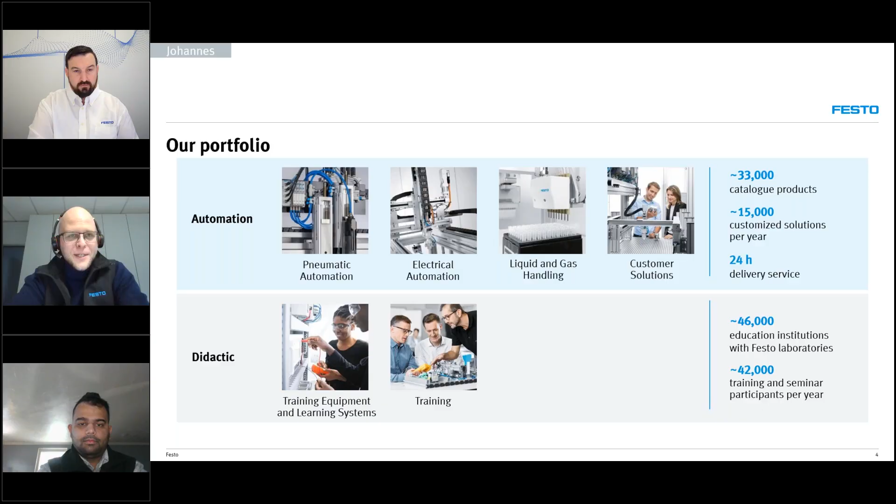With that, I would love to open up the stage for today's topic, more specifically the solutions for life sciences. The purpose which drives us, the mission here, is advancing human health through automation. Really looking forward to the upcoming presentation. With that, Ross, it's your part.

Hello everyone, my name is Ross. I'm coming to you live from our Technical Engineering Center in Marlborough, Massachusetts. I'll be discussing the applications of laboratory automation and diagnostics. Festo has about 33,000 components and is developing new products every day with inspiration from industry. Today we'll focus on the core life science applications. Some of you may not be familiar with the technology, so I'll go into a brief example for clarity.

With sample handling, it consists of 3D gantries, end-of-arm tooling, automation software, and sensors for precision and reliability. In vitro diagnostics are tests conducted on samples taken from the human body, such as blood, tissue, and other bodily fluids, to detect diseases and conditions, as well as infections. In vitro point of care diagnostics are tests done at a faster process, normally close to the patient, and cut down on lead times for samples to reach the lab and deliver results. These are normally tabletop solutions that do not scale up.

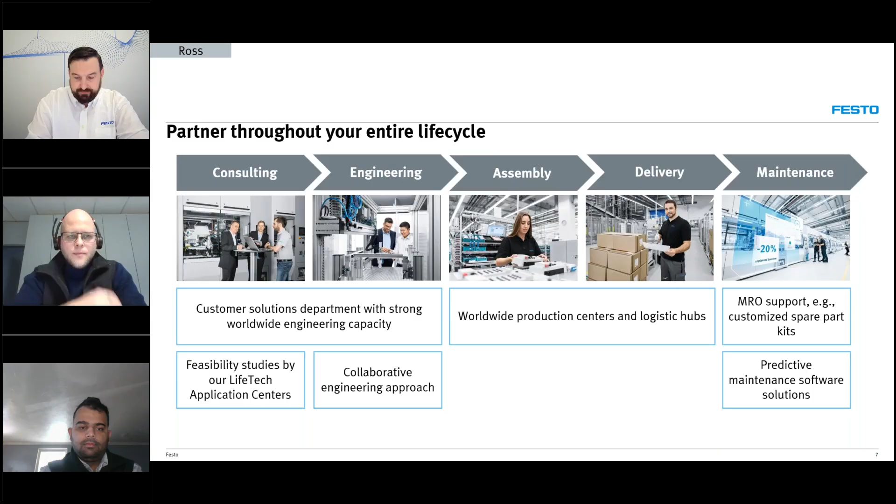So some of the examples of how we develop technology will be shown in the next few slides.

In this example, we were asked during the beginning stages of the COVID-19 shutdown to integrate an end-of-arm tool that could aspirate and dispense on a pre-designed system. Additionally, we needed an end-of-arm tool that was compact and capable of gripping and decapping sample vials, which hadn't been created yet at the time. The challenges here were precision, reliability, and increased throughput of tests per hour.

The previous process was done by hand. It was very slow and risked human error as well as cross-contamination. With software automation and custom designed components, we were able to achieve a system for the customer that increased throughput and accuracy from tens of samples per hour to over 320 samples per hour.

So here, the real challenge and success was creating a very compact rotary gripper that could decap, cap, and grip as well.

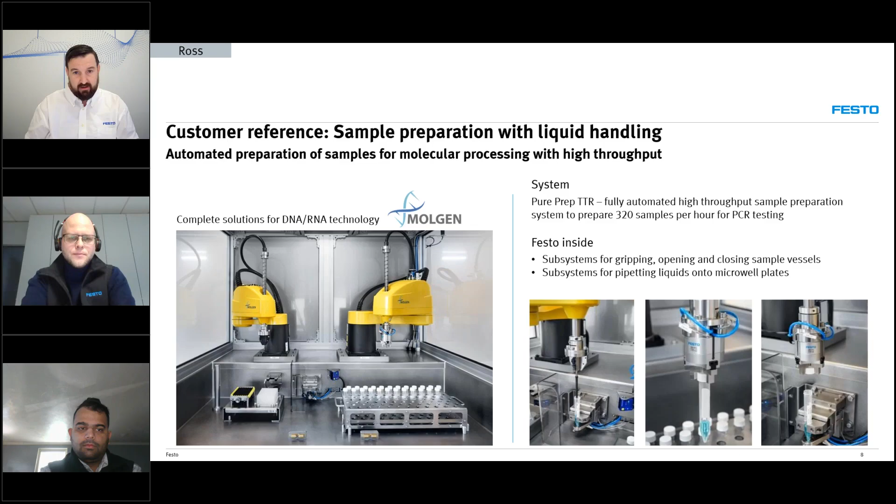In this next example, we helped reverse engineer an in vitro diagnostic process that analyzed DNA and designed a smaller mobile point of care system made up of about 90% Festo components. The original process was stationary with a much larger footprint, which we were able to reduce to about 2 feet by 4 feet, as well as making the application mobile.

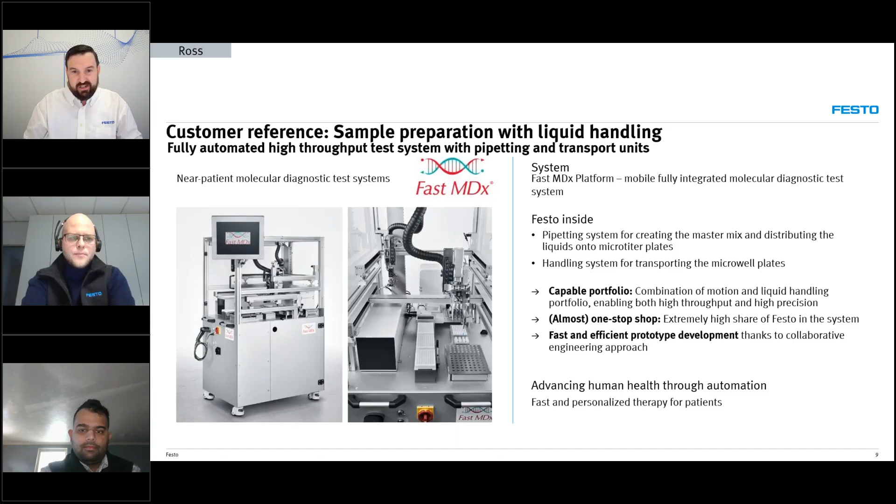The project highlights the importance of product synergy, as well as the additional design services offered by Festo, which is a standalone component supplier. As any other standalone component supplier, this is very important, and not many companies can achieve this other than Festo with our hybrid model.

In some cases, customers want a stationary industrial solution, but labor costs and operation can be expensive. In this example, Festo was challenged in creating a continuous process from start to finish that was completely automated. Many of the components used here included dispensers, decappers, grippers, AI-driven optical scanners, and conveyors, all integrated with automation software. The solution reduced the cost and labor size and streamlined the efficiency of extracting DNA samples from different vegetation to enhance the development of resistant seeds in agriculture.

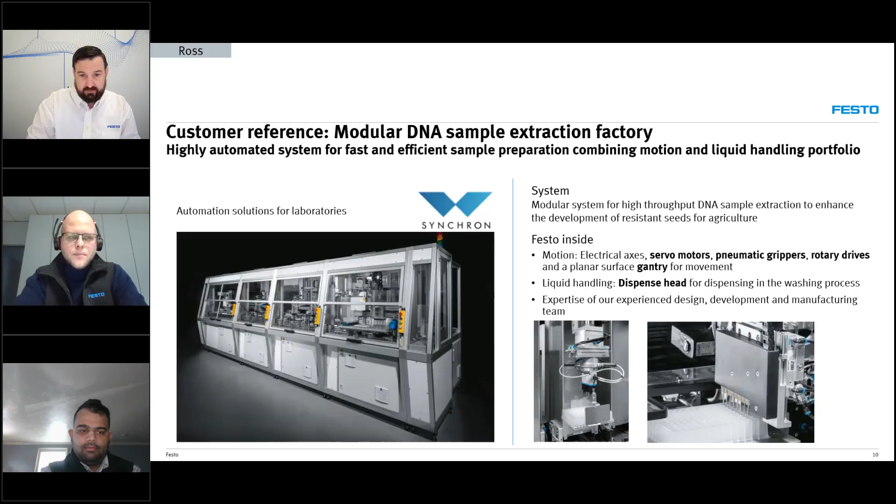Another challenge, inspired by industry, was a process of cellular growth for vaccines, gene therapies, and lab-grown meat via bioreactors. Although the process has been perfected in large-scale production, the most cost-efficient way to improve this would be to scale it down and provide a smaller batch and smaller footprint for R&D labs who are limited by space and costly research real estate.

Knowing there would be an increased need for this in the future, Festo invested in designing new components such as piezoelectric-driven valves, mass flow controllers, and vacuum pressure generators to aid the process of creating tabletop reactors, bioreactor systems that achieve optimal cellular growth. With that, I'll now hand it over to Sid to give you an in-depth look at the components that were developed through the industry needs.

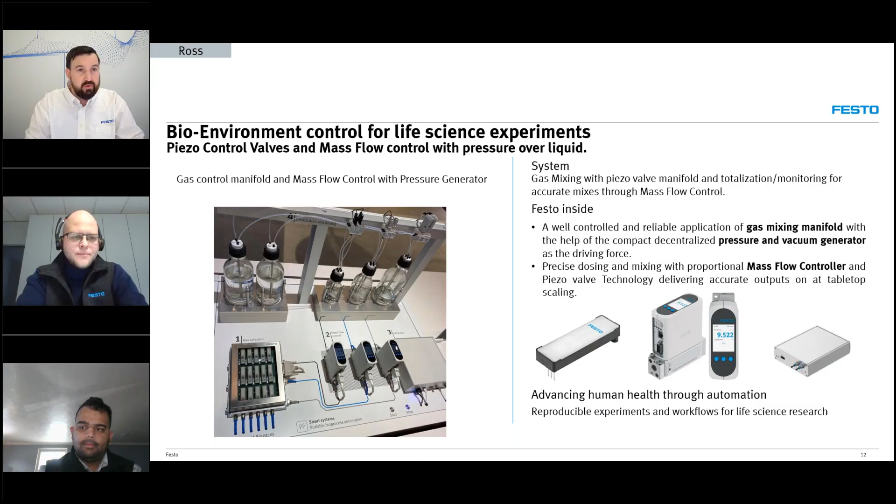At our Marlborough facility, as Ross already explained, there are 4 areas for life sciences, biopharma, or laboratory settings in general where we have deployed some of our solutions. When it comes to sample handling, IVD, point of care diagnostics, and bioreactors, we also need to break it down to some fundamental building blocks and talk about other aspects of automation where we may face challenges while commissioning such systems.

One such aspect is handling the liquid itself. It could be the high throughput of buffer solutions required for sample handling, or it could be non-invasive analysis of samples in IVD and point of care diagnostics.

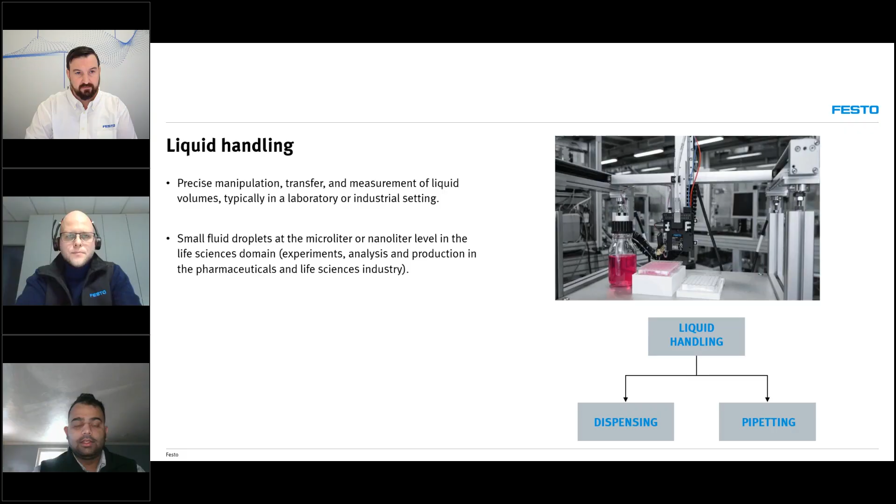First I'll get into what's liquid handling in general. Liquid handling means the precise manipulation and handling of liquid volumes in a laboratory or industrial setting. This could go down to small fluid droplets at the microliter or nanoliter level for preparation, experiments, analysis, recording data, and so on. Liquid handling is classified into dispensing and pipetting, and I'll give a traditional picture into dispensing and pipetting and how we need to automate some aspects of these processes to get rid of the challenges we have at the industrial level.

So, dispensing. Dispensing is a pressure over liquid process. It can be a contact-based or a non-contact based process.

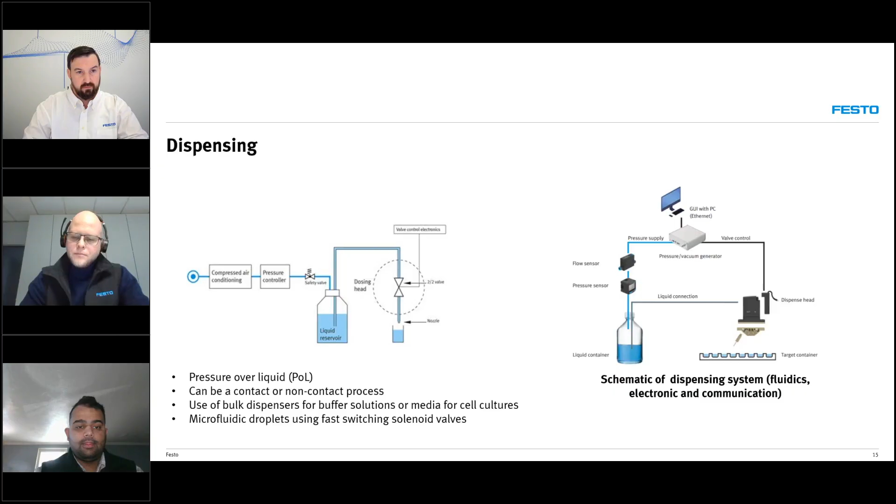Similarly, pipetting is a contact-based technique where we aspirate a specific volume of solution at one source container and deposit this solution to another target destination by using a permanent pipette tip, or a stationary metal or plastic pipette tip. It could be something like hypodermic needles.

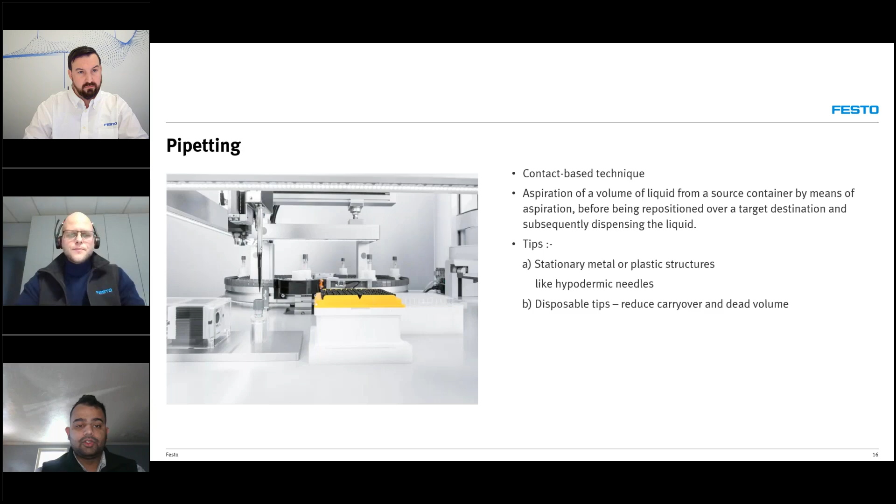We are also using disposable tips, which can be used to reduce carryover or cross-contamination between different samples during the dosing process, especially useful for handling patient applications. For example, where we have a PCR sample from a patient, and it's unique to each patient we are working with, and we want to minimize carryover as much as possible. So the use of disposable tips in such a scenario is the most optimal way of dealing with samples when we talk about traditional pipetting.

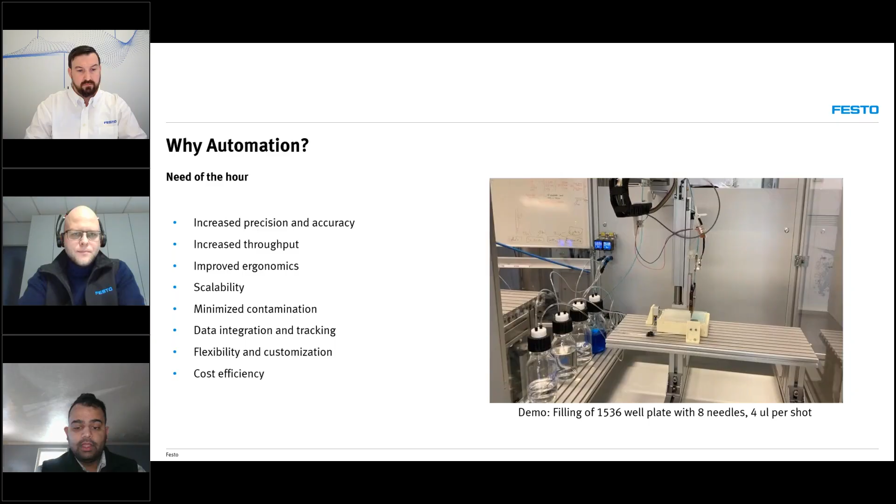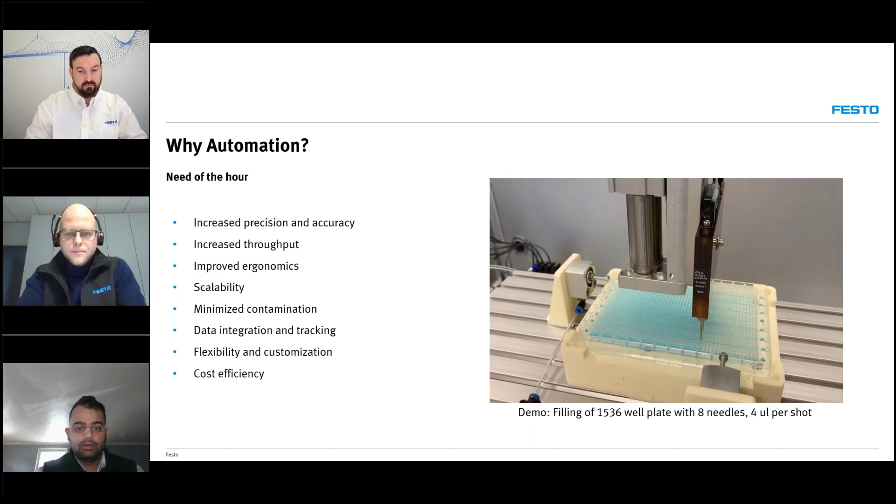However, we have seen during various situations, especially during the pandemic, that we need high throughput through these systems. We need increased precision and accuracy, which is one of the quality check parameters for these processes. Minimized contamination, as we already touched upon during dispensing and pipetting, as well as the flexibility to integrate various dispensing components into the overall modules that we use for dosing.

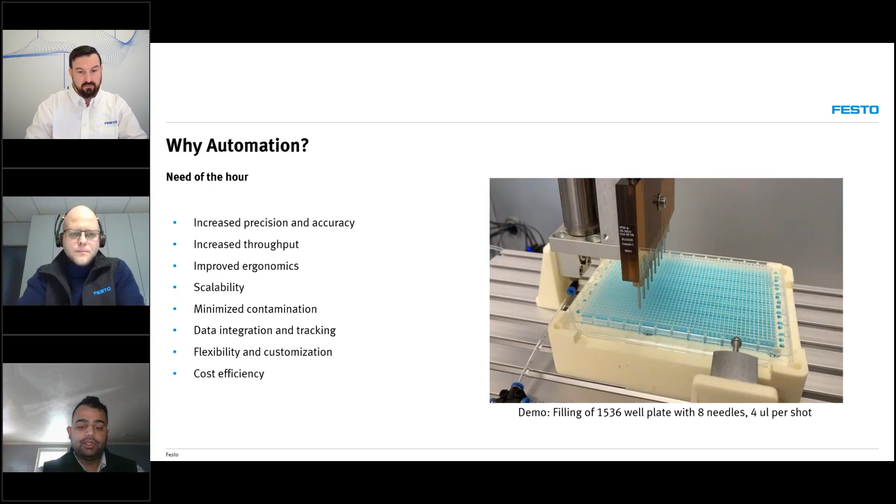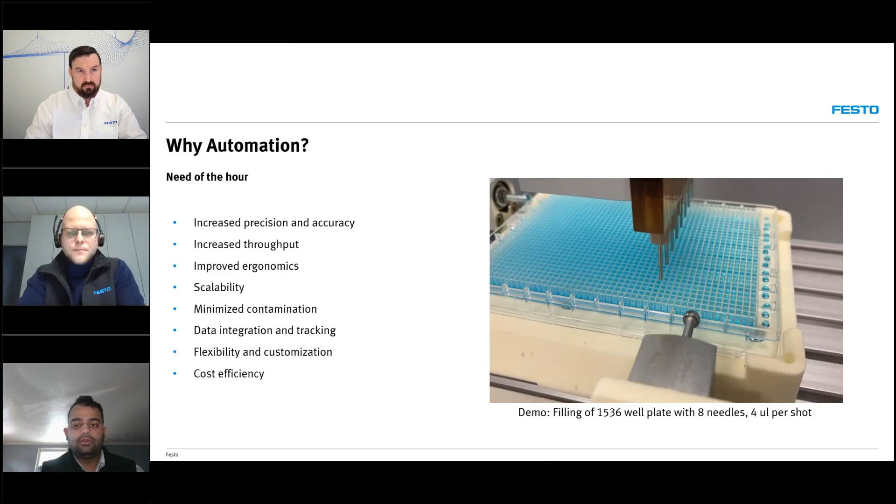So here you see a multi-dispense head Festo module in action, where there's the filling of a well plate. The lowest that we see here is 4 microliters per shot.

First, talking about dispensing systems, how do we solve the needs for automation in dispensing systems? We have these multi-channel dispense heads at Festo, where we can go from a few microliters to milliliters, and the internal components, including manifolds and valves, are media-resistant materials as far as both aqueous and non-aqueous solutions are concerned.

The individual configurability of each dispense head is something which sets these modules apart, because each dispense head can be configured for a different pressure, different actuation time, volume, and so on.

Easy integration is extremely important, especially when we are working with a multi-domain, multi-specialization industry. Our users could be biologists, somebody who's an expert with PLC-based automation, or a fresh student out of university who's very used to the Python environment. So we have drivers for each of these devices to cater to the users, and they can be integrated easily into their overall automation workflow as far as their code base is concerned.

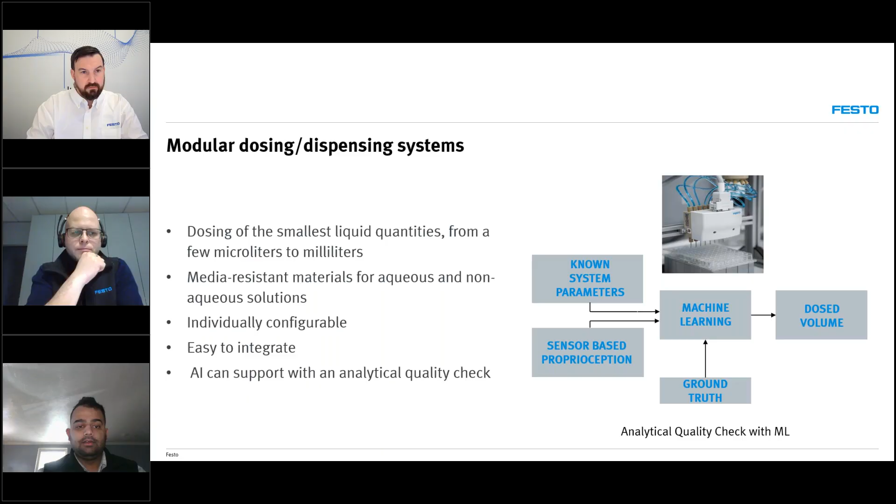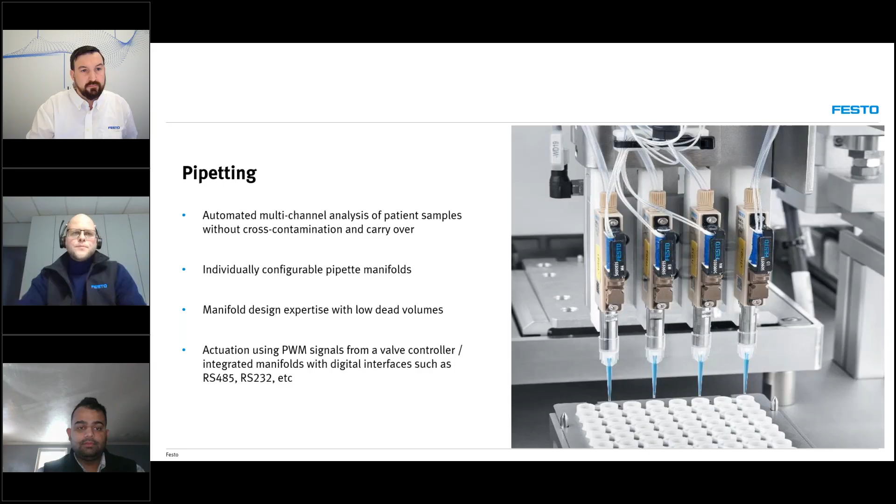In the traditional context, if we look back a few years, for setting up something like this they would have to take a huge bulky solution with an overkill in terms of the pressure being supplied, in terms of the number of valves in the manifold. It could also be that those systems would only work in conjunction with a PLC system for control using industrial protocols like EtherCAT, Profinet, etc.

So a lot of these requirements or features were an overkill for our biologist user in the academic market, or for even startups in the biopharma or life sciences space. So what we developed is a modular approach to tackling such problems.

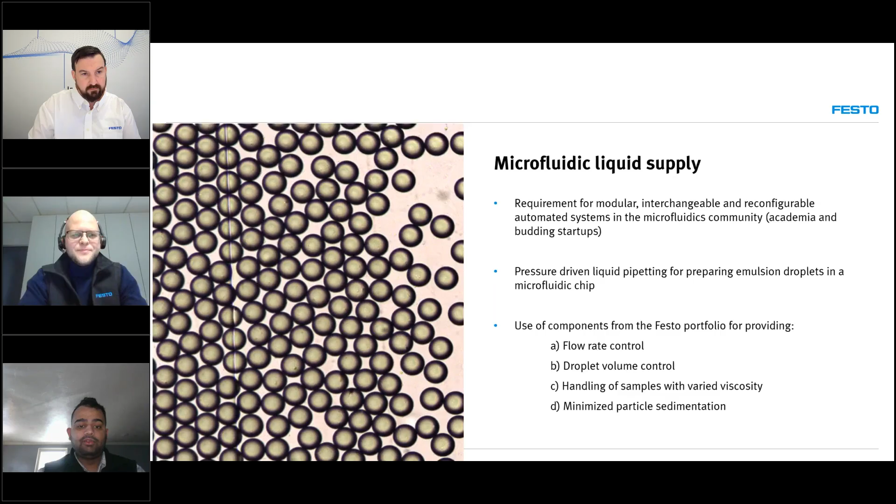Amazing, thank you guys. So we come to the last part of the presentation, and we want to give a bit of an insight into what's driving us at the moment. We've been a bit selective on the topics here, as well as the technology to show later, but it might be a nice insight to see what's ongoing.

What we're recognizing at the moment is the beginning of cell and gene therapies, and a lot of tissue and organ manufacturing, which places interesting questions to us as a component manufacturer—from handling cells to being able to produce in a sterile manner. These are things we're assessing at the moment, but also the question of minimizing sterile environments or volumes in a process is one topic, and I will present one technology offering a solution for that.

We also see a lot of healthcare automation, in particular from the working group here in Mass Robotics. We had wonderful use cases this year and last year, leading the way into automating dangerous and exhaustive processes which are actually dangerous for humans to execute.

And then, more in the healthcare environment, we also have process optimization, but individual patient monitoring, using for example wearable devices for tracking, using microfluidics for that is an interesting topic, on a very individual basis.

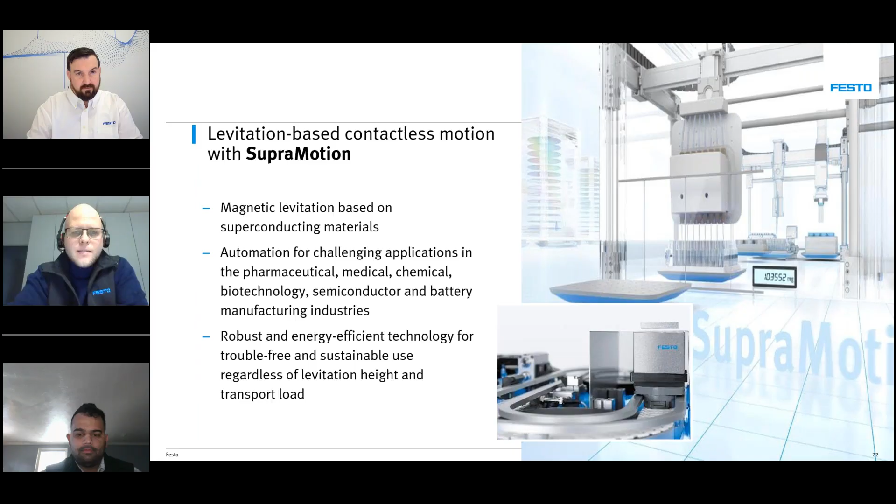If you go to the next slide, we can see in one application example how that actually works, or could work, together with different other automation technologies and products we have. This is a process which covers the entire process of filling a biological product.

In this case, our process was a microbiome therapy, and there are certain containers which have to be filled with exactly that kind of therapy before being dry frozen. These therapies have to be handled and filled in a sterile environment, a clean room environment, because the therapies are getting in touch with the ambient environment.

With the ambient air, which makes it critical here to move things into the sterile environment, but also to handle it within the sterile environment without any contact.

The principle behind it is a superconductor, which is frozen down to a certain temperature—usually about 70 Kelvin. And the magnet on top is frozen into that position, more or less sticks in that position, which enables us to be rigid, depending on the geometry of the magnet, to be fixed in position in the room no matter how we tilt in the end the good which we want to transport.

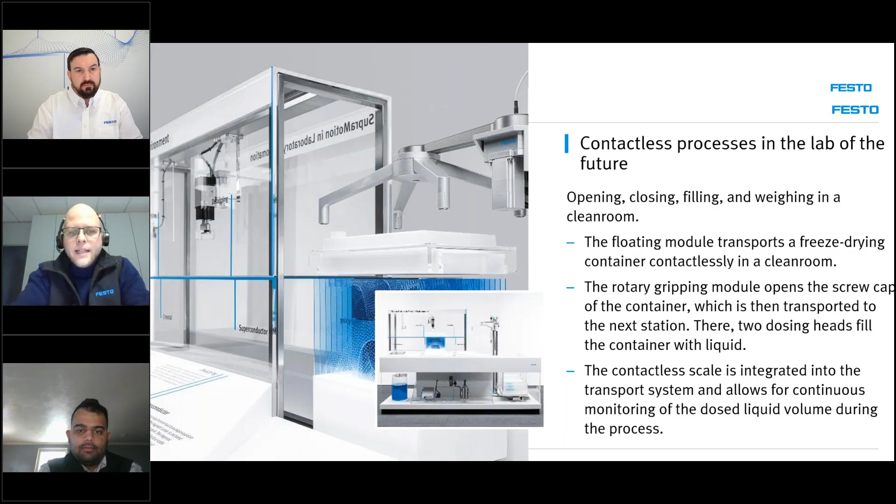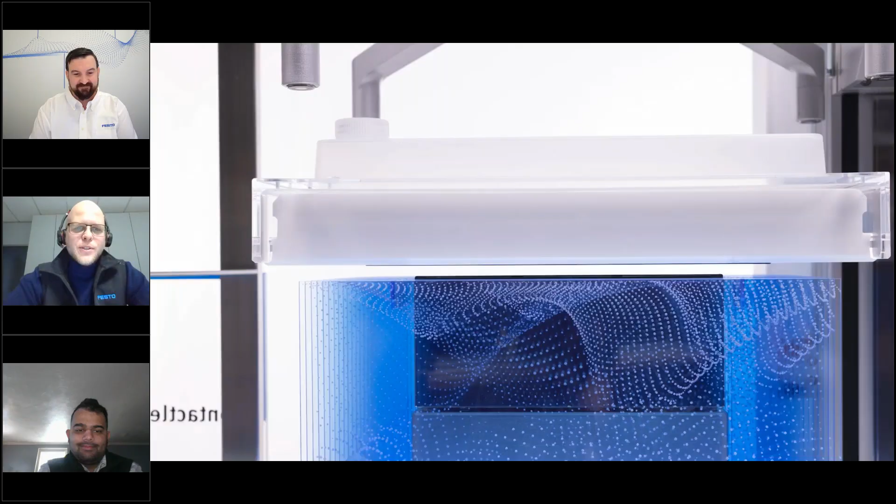If you go to the next slide, we have a nice animation for that, how the process could look like. Apologies for having the first slogan in German—it's like 'Supramotion in a lab automation environment' as a translation.

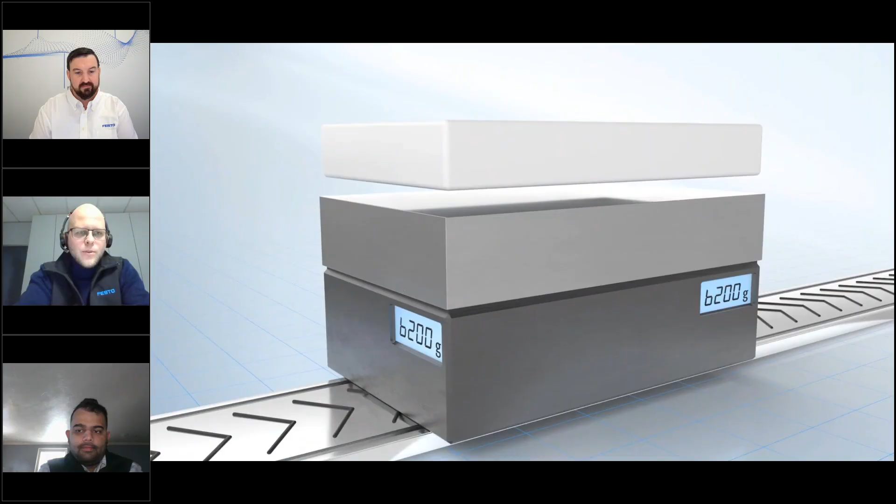What you can see here is the lower block is a scale which is moved. We have a cooling element, a cryo cooler, which has gone down to those 70 Kelvin. And on top we have a magnet conveyor, which can carry a certain load, and this can be brought into a sterile environment.

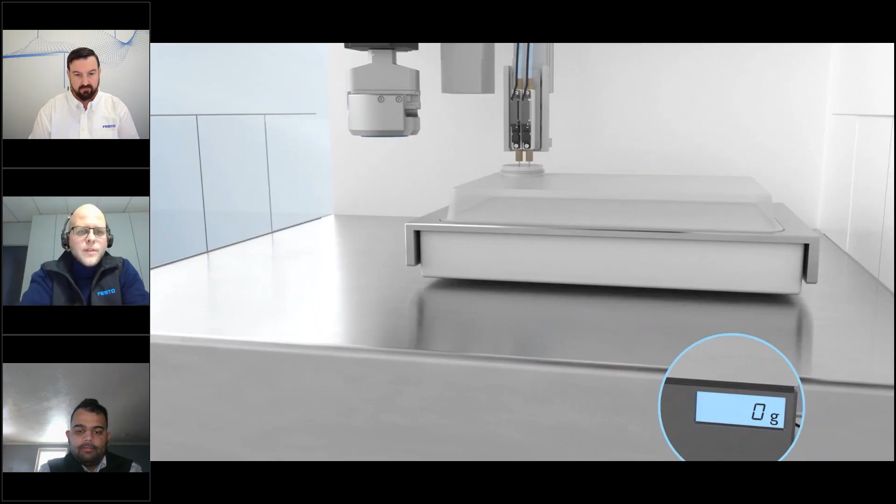We see here a decapping solution, and then a dispensing solution to fill the therapy in there. We can close it again, so we're still sterile. We have it covered again and sealed, and now it's running to the next process, which is basically the dry freezing.

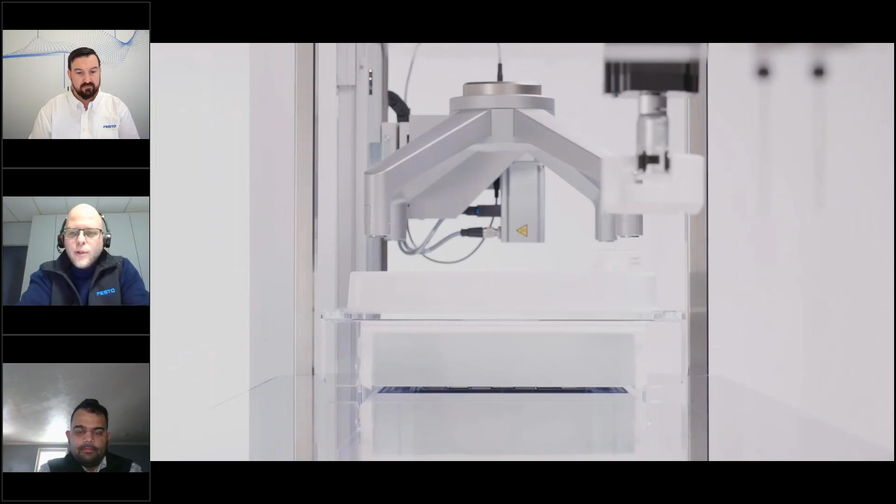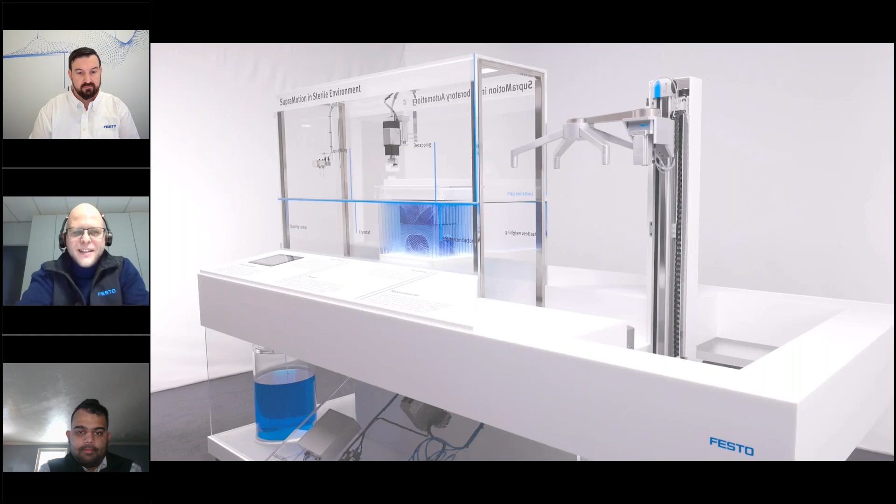We actually built that, and as you can see here, you can levitate this carrier through all non-magnetic materials. Of course, if you have something magnetizable within, then you might get a problem with it sticking, or interfering in the height, the air gap in there.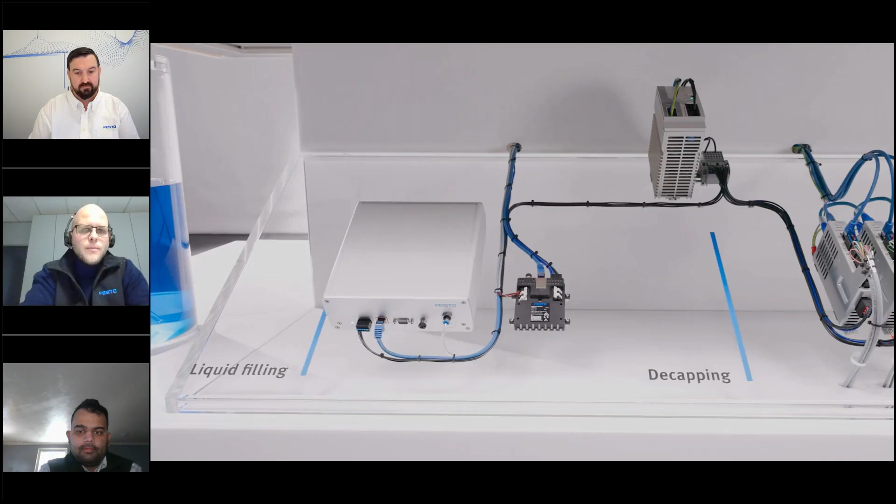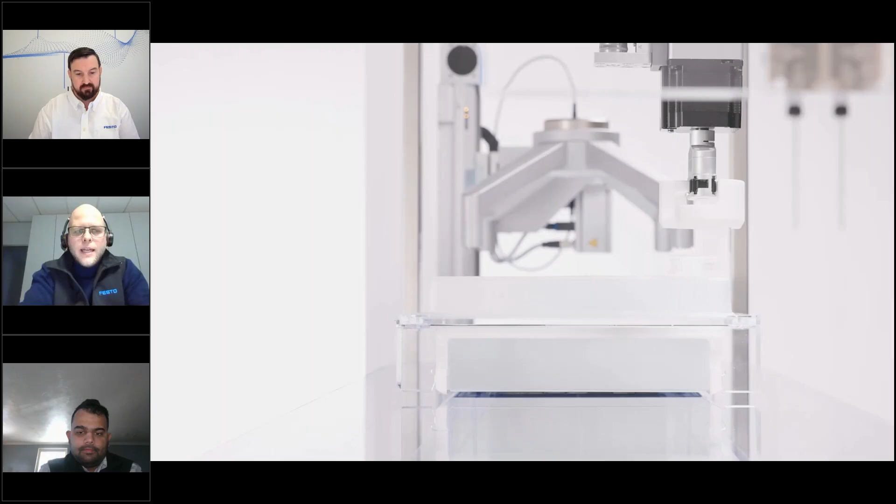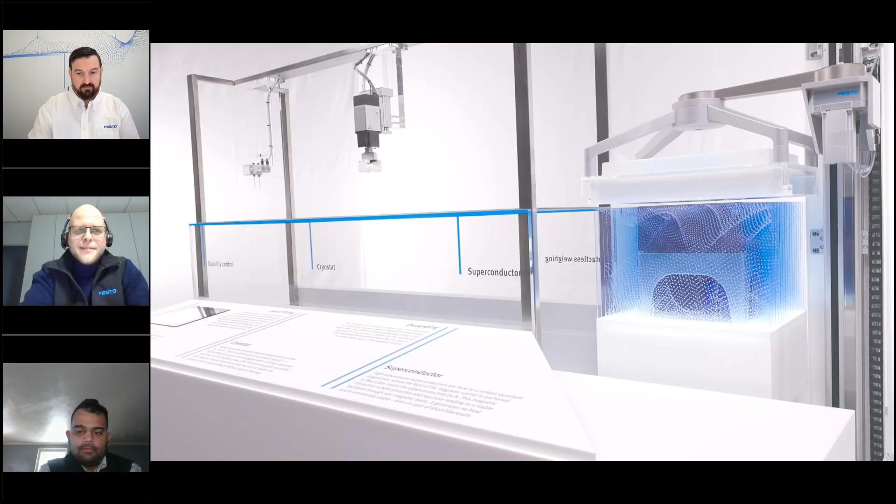Yeah, and this is just one application. We have several other applications, like for example, the weighing is one thing. We can also transport heatless here. That's very important, so we do not induct any heat by the magnetic carrier here. This is a pretty interesting technology, and it operates on very low energy consumption. This is one of the technologies we are working on at the moment.

We just had some outlooks or further challenges, in particular for lab automation, which we see, very much from the perspective of a component manufacturer. One challenge is the integration of components and subsystems into actual automation, because these topics, for us, are daily business, being in the automation sector. But for biologists, chemists, and so on, integrating and automating stuff is sometimes a huge hurdle. Usually you need engineers supporting them, and those engineers have to understand a lot of the biology. I think that lowering the hurdles of accessibility of automation is one key point which we have to address in this sector to make it easier to automate at the end.

Referring again to the cell therapies which are upcoming, the automation for regenerative medicines or individualized medicines is one point which will keep us busy in the automation part, for quality control, for example, but also the liquid handling containing cells, very small flow rates, and fluidic and mechatronic function integration. That will be something we will have to deal with for the upcoming years.

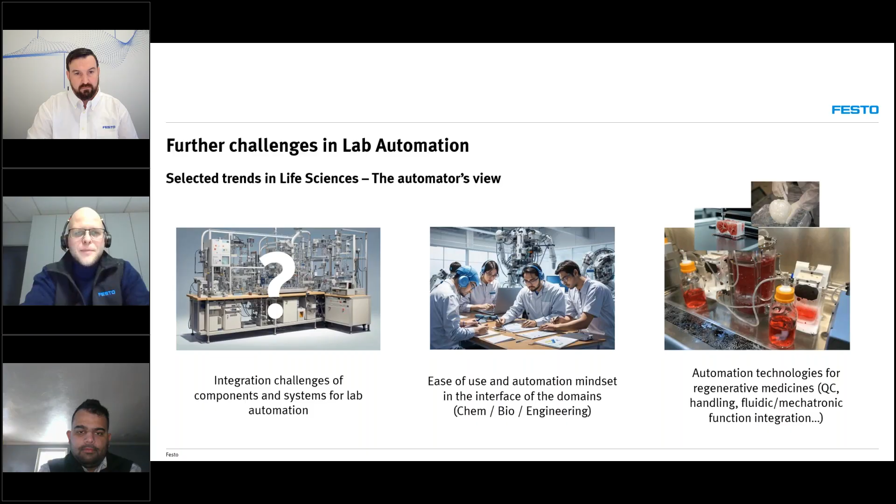All right, and at this point, I would love to close the presentation part. Thank you very much.